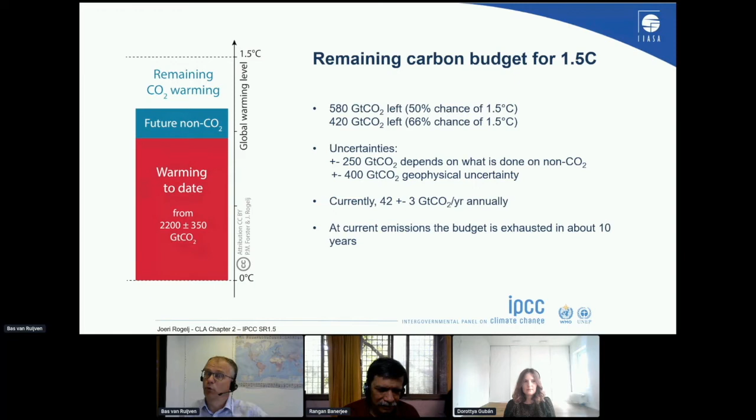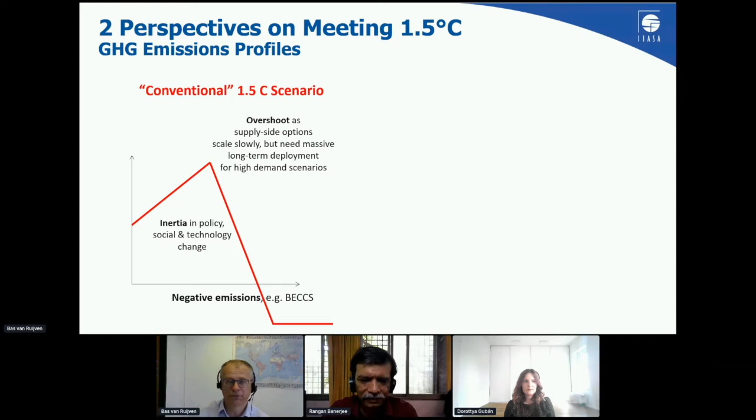In the scenario world, there are two perspectives on how to meet this target. The conventional approach has been that this 1.5 degree carbon budget is so tight that we probably need to overshoot it and then come back in temperature later in the century, going below zero with negative emissions. But what we try to do in a study we are publishing at the moment is to look at scenarios that do not overshoot and come back with negative emissions, but instead have a rapid transformation towards net zero now, immediately at the beginning of the century, with net zero emissions globally afterwards.

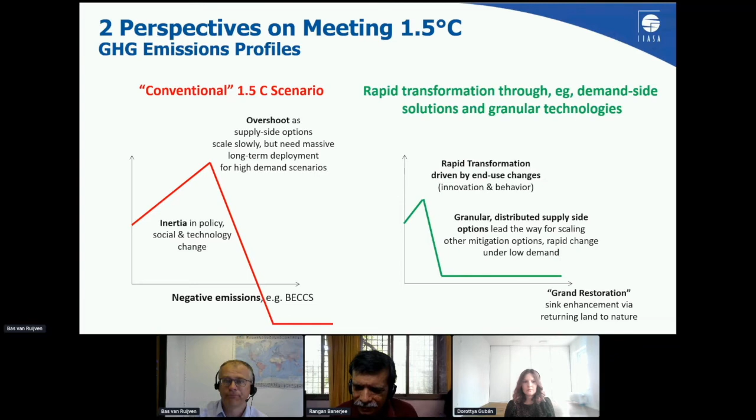This big community effort that we are coordinating at IIASA in the ENGAGE project explores the difference between the red arrows and the blue arrows in this graph on the left. Red arrows are scenarios that overshoot and delay the transformation but then go negative later, and blue arrows are scenarios that immediately go down and don't go below zero later in the century.

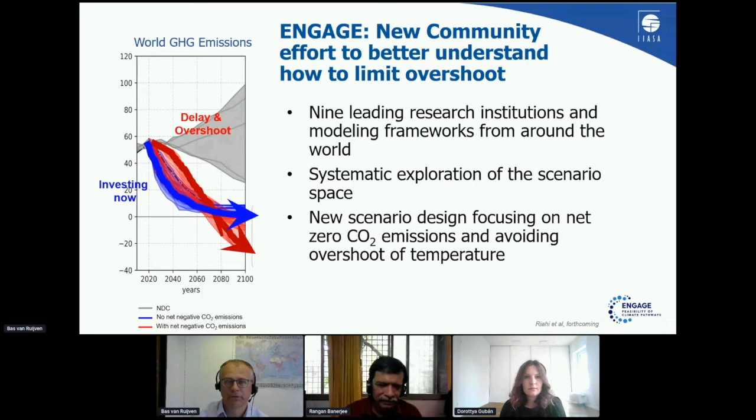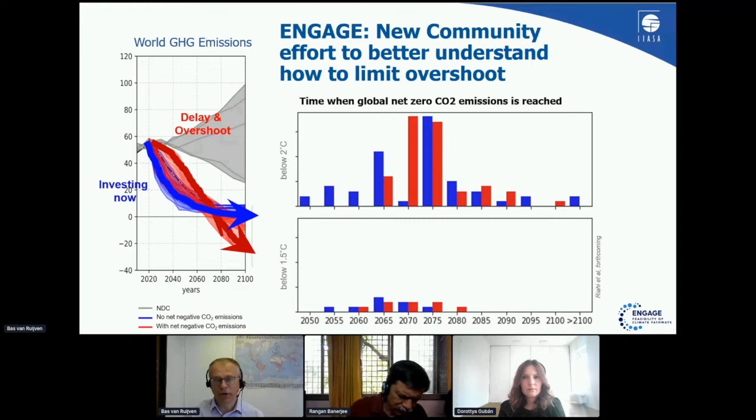If you compare these full-century versus net-zero scenarios, what we see is that for 1.5 or 2 degree scenarios, if you want the blue scenarios, the net zero scenarios, you need to reach global net zero much earlier than when you're allowed to compensate later in the century.

When we look at what these scenarios would mean for the different sectors, starting from the present day situation, we see the emissions in CO2 across the different sectors: forestation and land use and energy supply in green and red on the bottom, transport in light blue, and the industry sector especially in yellow and dark blue towards the top, which are industrial processes and industrial energy use. Those are a considerable chunk of present day energy emissions.

But if we look at their role in these net zero futures, we see that industry emissions are reduced, but often actually remaining still in a net zero world. Those positive emissions are being compensated by negative emissions, by carbon removals from the power sector and from land use.

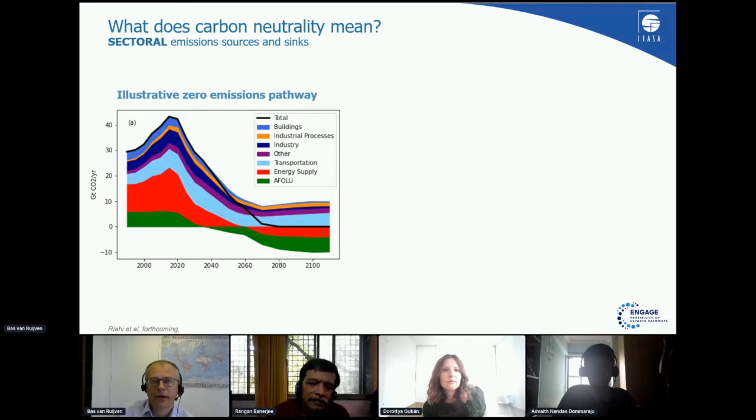This is one illustrative pathway from one single model, but since we do this exercise with many different models, here you see on this top right graph the balance between positive and negative emissions in a net zero world across 9 different integrated assessment models that partake in our study.

You see that often the sectors below zero are the power sector and the land use sectors, the red and the green, and above zero one still has sectors like the industry sector, both processes in yellow and energy use in dark blue. The only exception is some models actually see industry energy use or industry processes sometimes contributing to net carbon dioxide removals.

If we look at the timing of net zero emissions, we also see that land use and energy supply are the first ones to reach net zero, but industrial processes and energy use in buildings, transport and industry are much later, if reaching net zero at all. So that's how across all of the integrated assessment models we see the emergence and the role of the industry sector in the bigger picture of reaching a net zero energy system in the second half of this century.

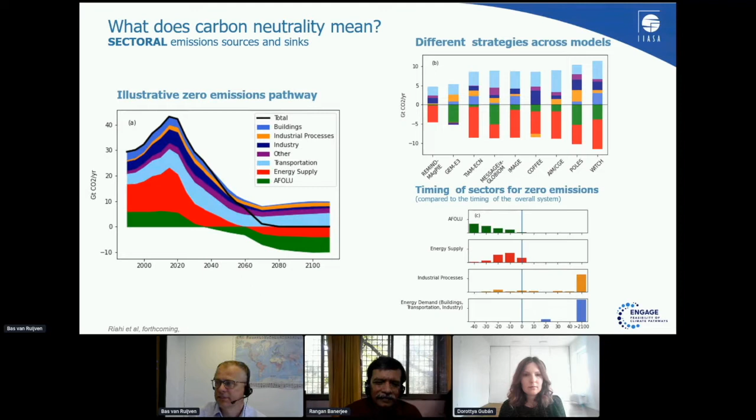Thank you, Bas, for providing the overall perspective and showing us how industry is actually a relatively harder to abate sector, and also that the industry sector could go to net zero and also be negative. So I'm going to quickly show you a presentation on the perspective of the zero carbon industry.

We start by looking at the Kaya identity. If you look at the total amount of CO2, we could typically break it up into carbon per unit of energy, energy per unit of materials, materials per unit of the product (material intensity of the product), product per unit of service, and amount of services. As the population wants larger amounts of services, we want to try and dematerialize, or reduce the energy intensity of the materials, or the carbon intensity of the energy.

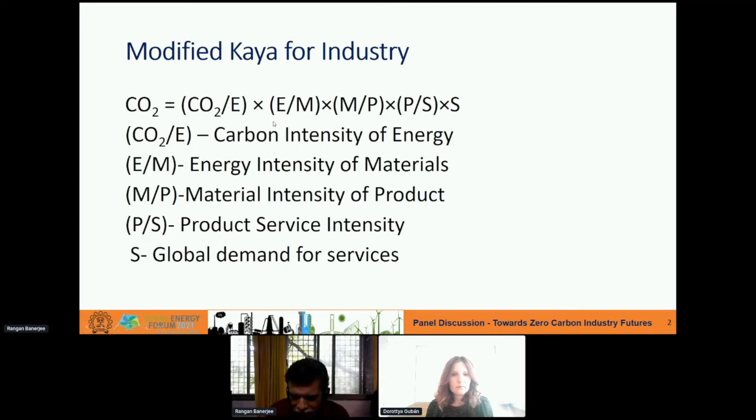This immediately shows us the options we have in industry. These options are energy efficiency—we can think in terms of benchmarking, cogeneration, process integration. We can look at resource efficiency: alternative raw materials that are less energy or carbon intensive, dematerialization, redesign of products, substitution of materials. Or we can have the same amount of energy but green the mix, using solar photovoltaic, solar thermal, biomass, waste to energy. We can look at product efficiency and recycling so less virgin material is used. We can also think in terms of next generation processes. And finally, we can keep the energy system the same but capture the carbon, utilize it, and then store it.

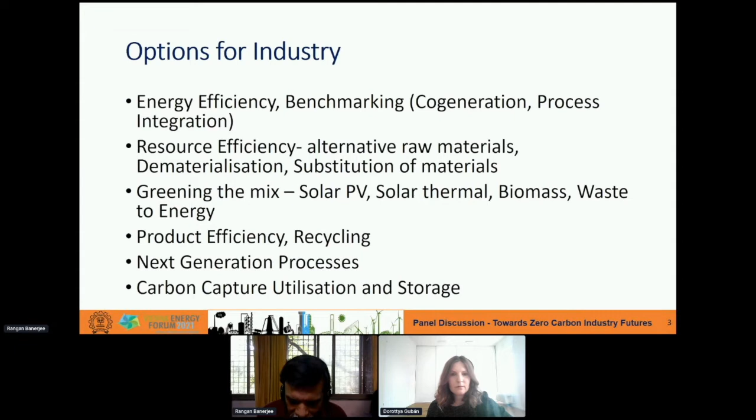On all these options, there are actually several examples in industry, and I'm going to quickly take you through some of these examples and open up the panel for discussion.

Overall, when you look at an industrial process, we start from raw materials and get the desired products. In the process we use a lot of utilities, but we can try to make this a cyclic process where we use most of the internal flows so that we use less of the external utilities.

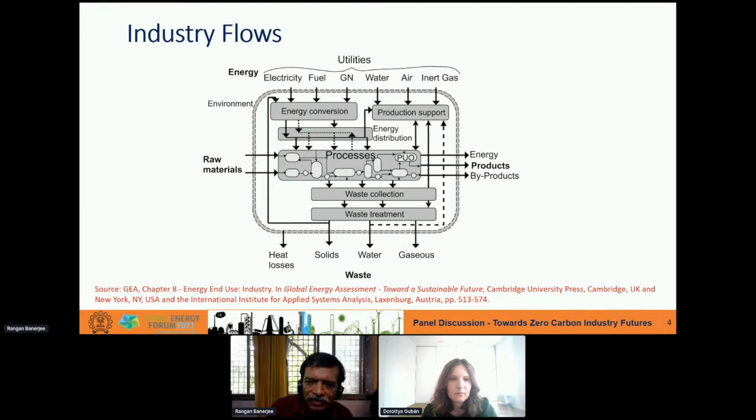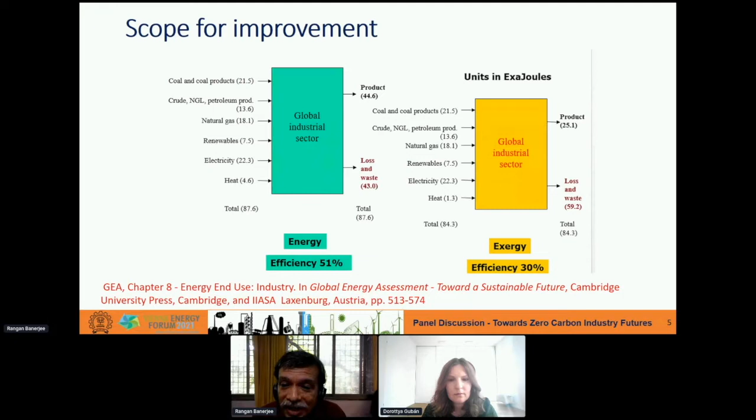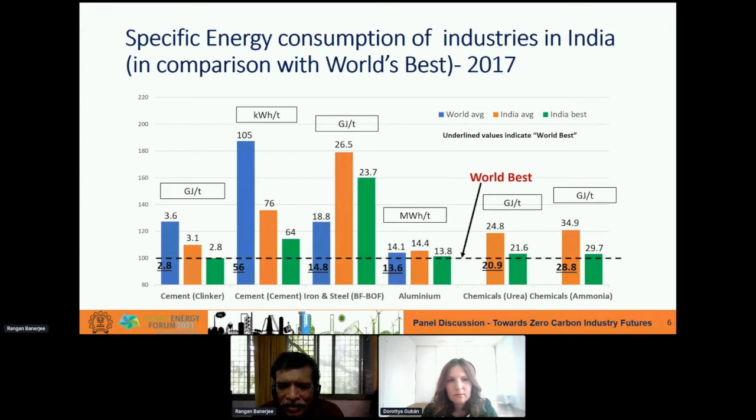I'd like to show you a glimpse of some major industries in the Indian industrial context. This shows that in several Indian industries, we are amongst the world's best—for instance, in the case of cement. If you look at some of the others, we have some catching up to do compared to the world's best, and then there is the average. So there are many industries which are much lower than the actual best practice within the country or globally.

You can see a similar kind of emission pattern—these slides will be made available to you. This is the CO2 emissions, and interestingly, in the case of aluminium, though we were near the world's best in terms of energy, we are much worse than the world's best, and that is because the aluminium sector basically uses electricity, and a large amount of this depends on the electricity mix.

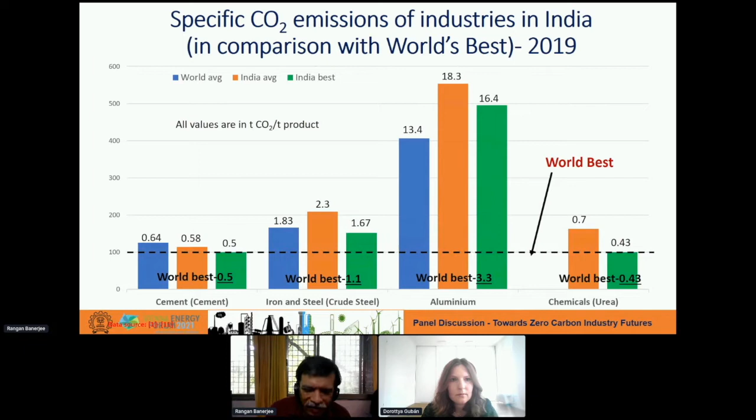Most of the Indian electricity mix is from coal, hence you see 18 tons per ton of aluminium, while the world's best is 3.3, where this is a plant using hydro for electricity. So there are many different options we can look at.

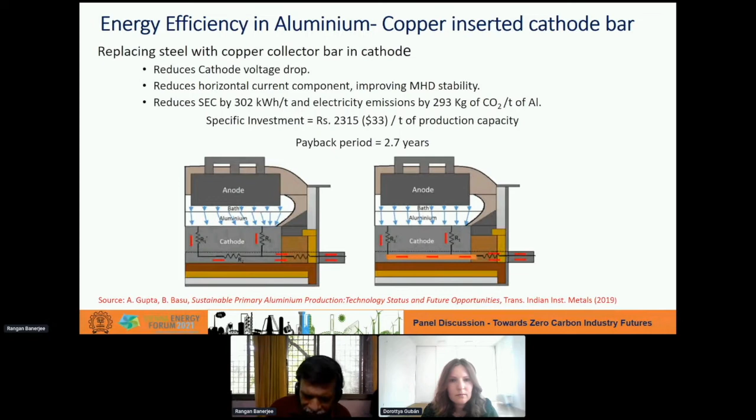One set of options which is a no-brainer is that in each of your industrial sectors there are many different energy efficiency options, and these are usually cost effective in their own way. For instance, in the aluminium sector, you can look at replacing the steel with a copper collector bar, and in this industry this has a reasonable payback period.

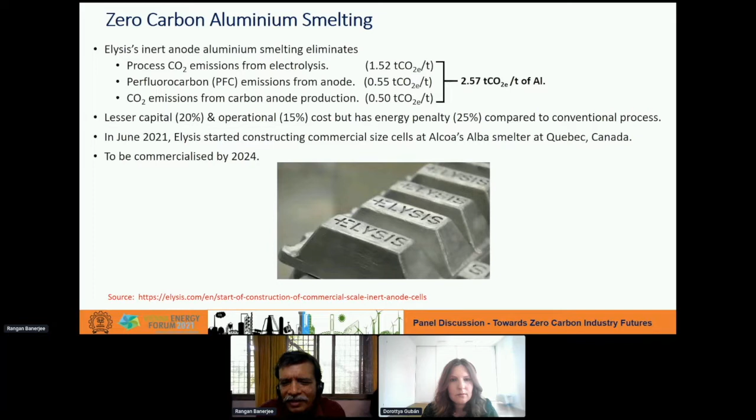There are also new processes being talked of, still in development. There's a new company focusing on zero carbon aluminium smelting, looking at inert anode aluminium smelting, which is still in process and prototype, with a large plant planned to be commercialized by 2024.

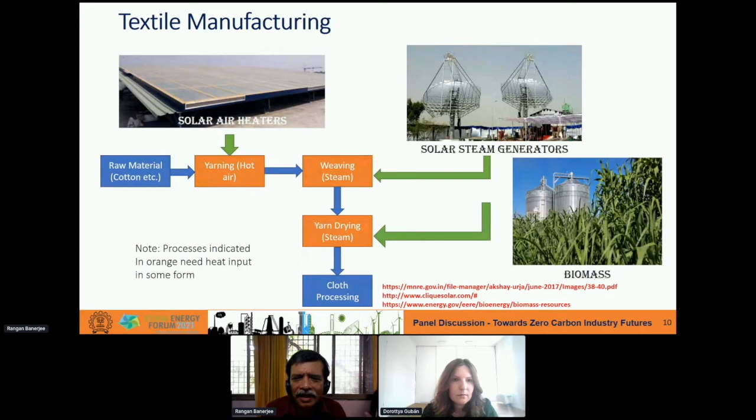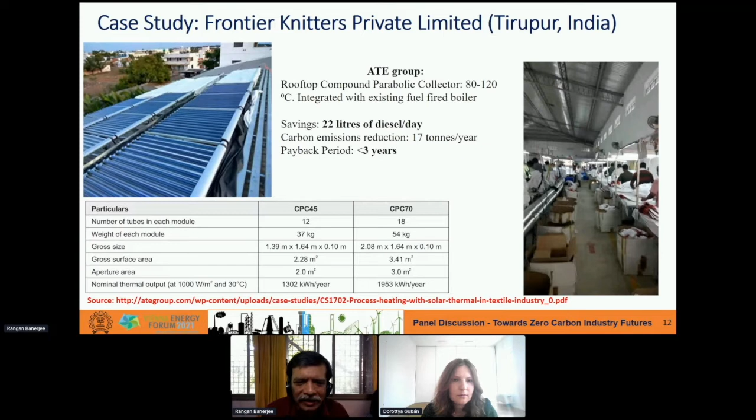Some examples in the textile industry in India look at solar thermal, biomass, and solar photovoltaic, and this actually meets all the requirements for textile manufacturing in an Indian context. One of the examples from India.

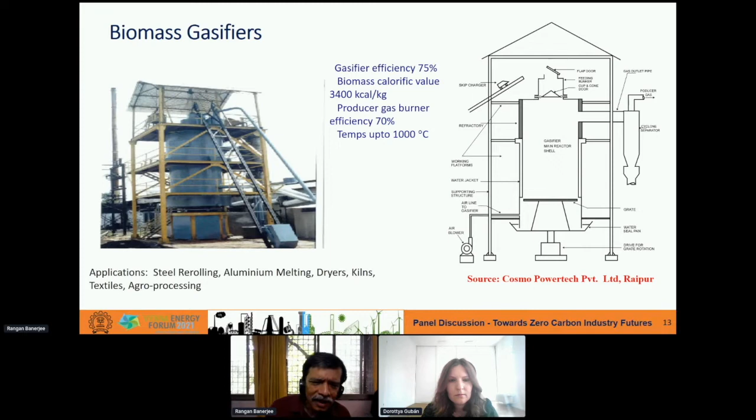There are several examples of biomass gasifiers being used in steel re-rolling and aluminum melting instead of fuel oil or light diesel oil, and these are commercially applied in the small sector.

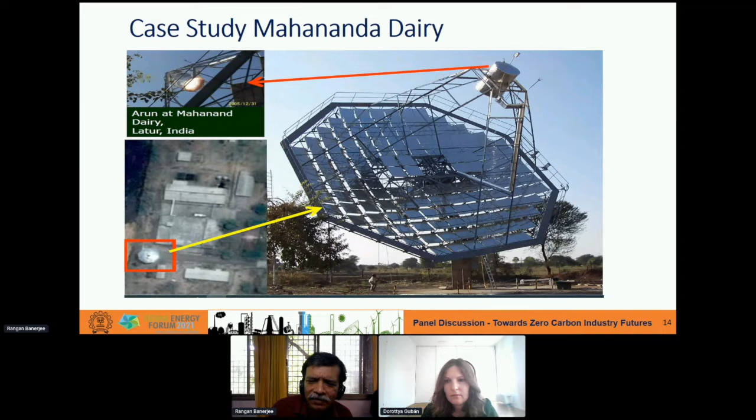This is a solar concentrator used in a dairy in western India. Instead of steam generation from furnace oil, this uses solar concentrated steam.

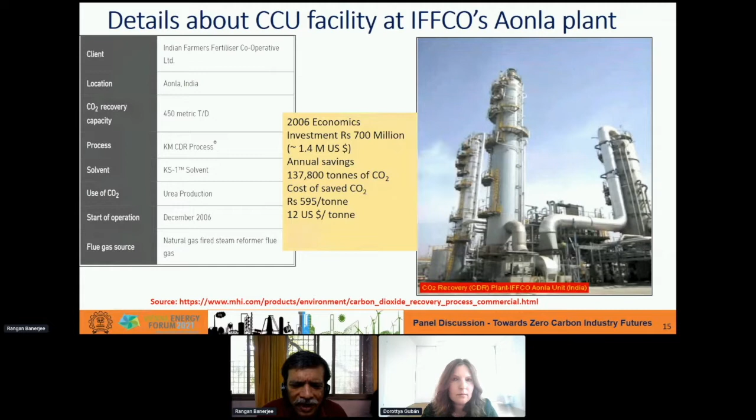We also have examples of carbon capture and utilization. This is an example from a fertilizer company where flue gases are scrubbed with a MEA system, where you take out the CO2, and that CO2 is used in the production of urea. This is reasonably cost effective in terms of tons of CO2 saved.

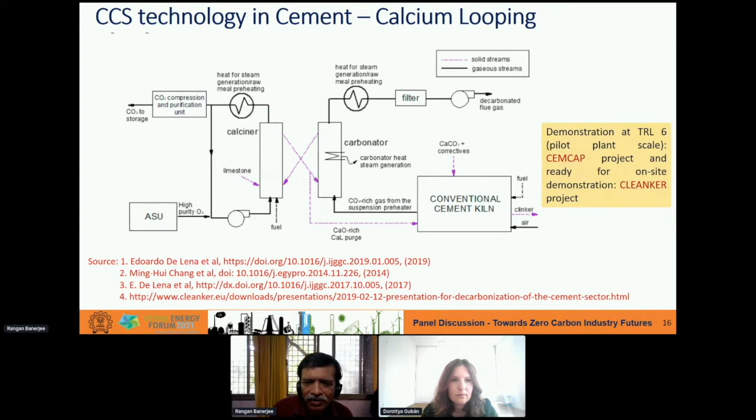There are also processes now at pilot scale where you integrate cement with calcium looping technology, so the CO2 is captured and then goes out to storage. So several things are possible, whether related to energy efficiency, renewables, or carbon capture and storage.

Now the questions for discussion today in the panel are: is zero carbon or low carbon an achievable goal for industry? What are the barriers? What policies are needed to support these industry transitions? What needs to be done to catalyze the R&D required? Where will the investments come from? And is there a competitive advantage or disadvantage for industries that opt for low carbon?

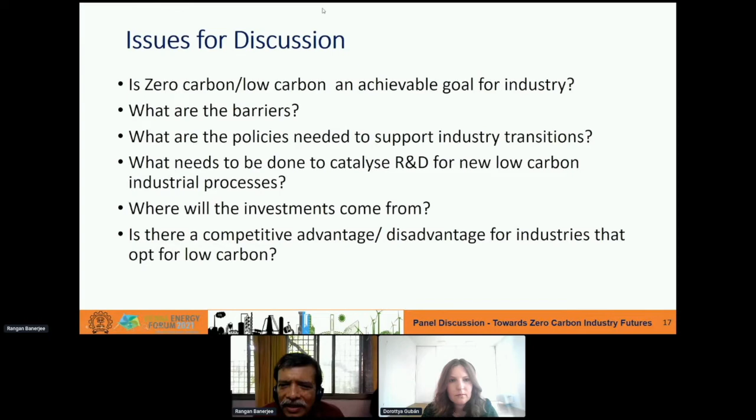So with this, I will open this up, and we will request our panelist. Lars, will you please go ahead and provide your opening remarks?

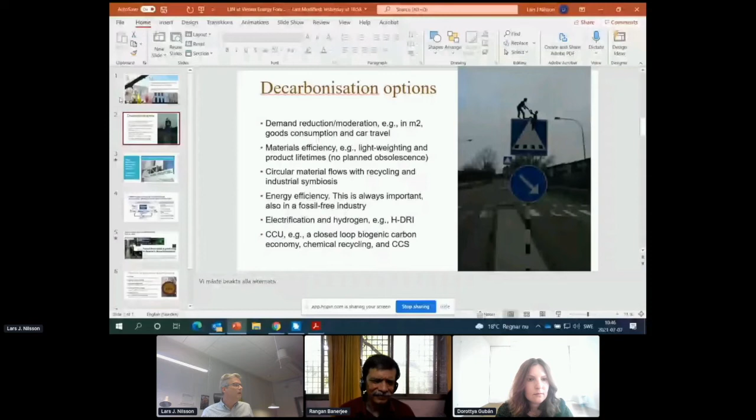Yes, I also prepared a short presentation for you. Do you see this now? I don't see the slides. I don't know if others are seeing it. Can you try it again? Okay. Now, okay, we see it. Yeah, we see it. Please put it on slideshow.

Thank you. Starting where you started, Professor Banerjee, with your Kaya identity, and stressing the importance of looking at demand and materials efficiency and recycling for the purpose of having to produce less primary materials, primary production.

I think a big change that has happened in the past years is that renewable electricity has become much less expensive with solar cells and wind energy technology. So electrification and hydrogen have become real and interesting options.

And I think we saw a real shift in strategies in industry after the Paris Agreement, when it became quite clear... sorry, I have some sound issue there.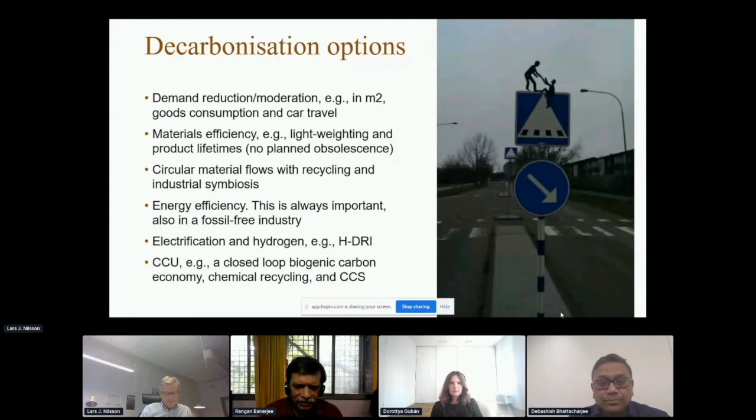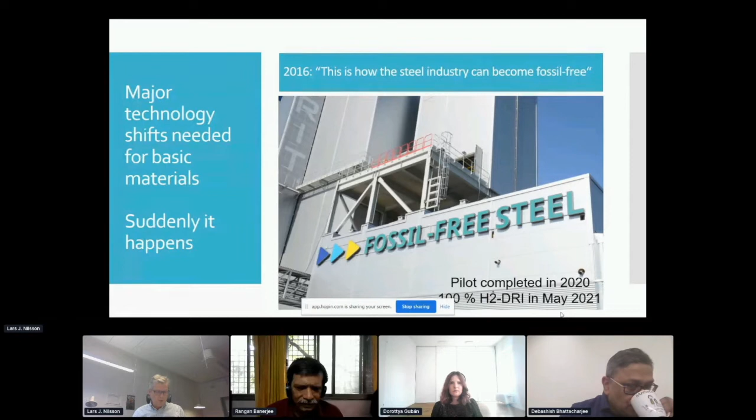So, for example, in 2016, the Swedish steel industry announced that they will become fossil-free. And just a month ago, they produced their first 100% hydrogen direct reduced iron here in May 2021. They've also accelerated plans to build a large-scale demonstration, 1.35 megatons per year, with a 500 megawatt electrolyzer capacity. So this is moving quite quickly now in the steel industry, not only in Sweden but also in other countries.

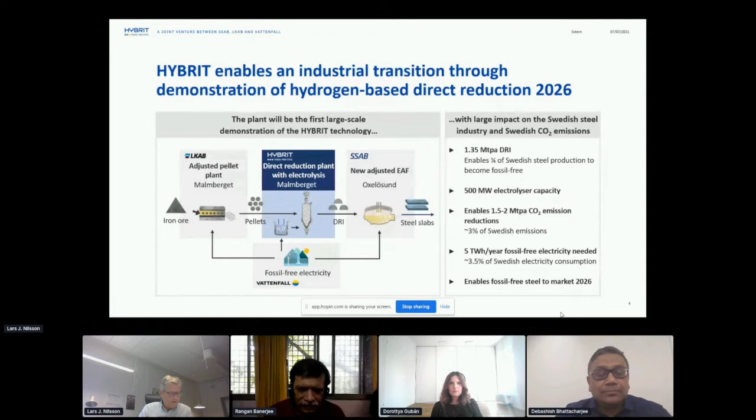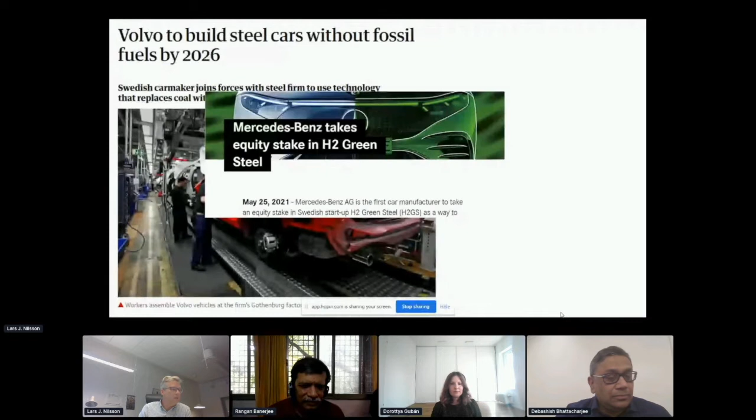A lot of interest from car makers. Volvo has hooked up with this HYBRIT project, but there's also been the announcement earlier in spring of a H2 Green Steel plant, a greenfield new steel mill, where Mercedes-Benz takes an equity stake, and also truck maker Scania gets involved. So certainly things are moving quicker than one would have thought a few years ago.

On the policy aspect that Professor Banerjee mentioned, we've done some thinking around how we can think about this industrial decarbonization transition, informed by different literatures, including innovation system literature, pointing to the importance of directionality. We need a clear direction for development for industry so we're not creating new lock-ins, and we need to look at the whole value chain, not just the primary production. Of course, we need innovation and new technologies.

But even more, we need to think about how to create and reshape markets. How do we create green market demand? As I exemplified, there is a demand, for example, for green steel in the car industry.

We need to build capacity for governance and change also in the industrial sector. If you compare with the energy and transport sectors, where we have government ministries, government agencies, whole university departments working on transport and energy, we don't really have that when it comes to industrial transformation. And of course, industry is a tricky sector because we need international coordination and coherence due to competition between countries for industrial products, and also taking care of phase outs of, for example, blast furnaces, and the retraining and reinvestments needed for making this transition.

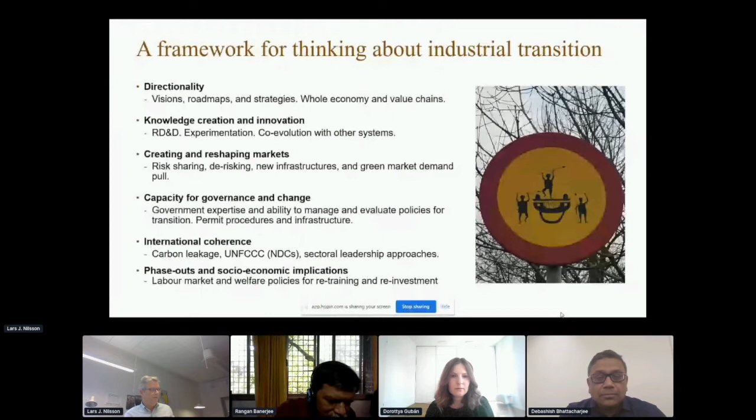So that was a very short input to the discussion on policy approaches, and I hand back over to you now.

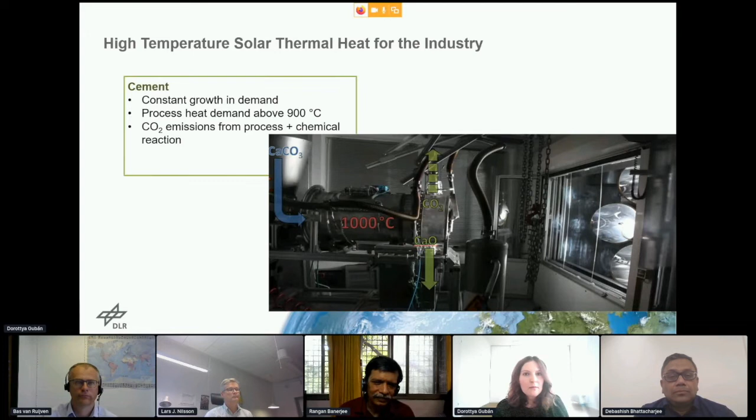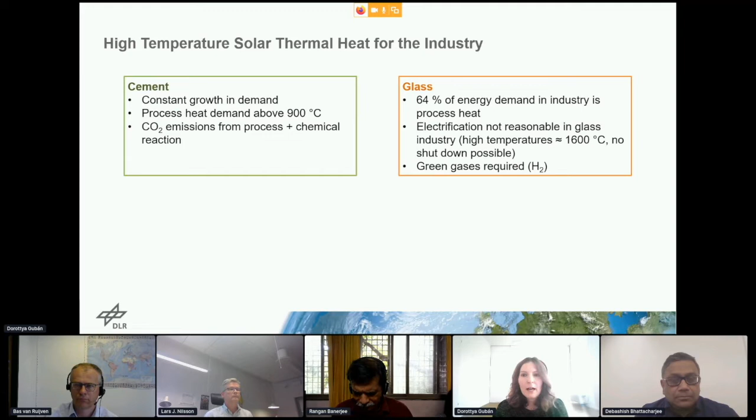Another very important chemical for the industry, also mentioned, is of course hydrogen. One example is the glass industry, where we need extremely high temperatures for the process, which is not even achievable, at least yet, with CSP technologies. That's why we need some sort of fuel, for which hydrogen is one possibility.

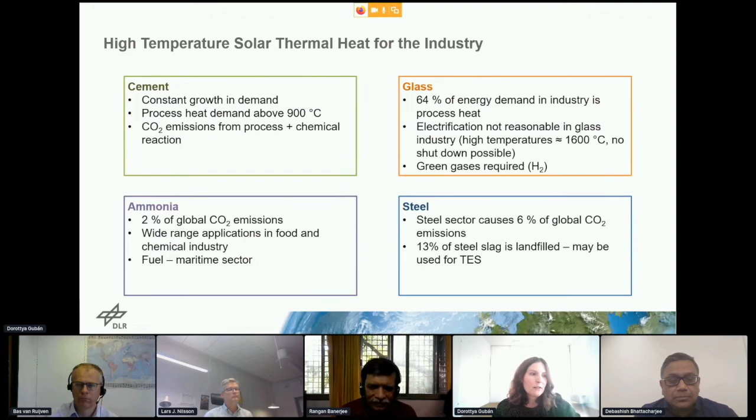The next example is the steel industry, where we need hydrogen for the reduction, also mentioned before. I would also like to put here the ammonia industry, where one of the most important feedstocks and one of the highest energy demands comes from providing the hydrogen for the Haber-Bosch process.

Here we developed two different concepts, one for the short term, to reach the goals by 2050, and one for the long term. The first concept is actually a hybrid electricity-thermal plant which utilizes an electrolyzer. And in the long term, we are considering a fully thermal energy based process, so water splitting via a thermochemical cycle.

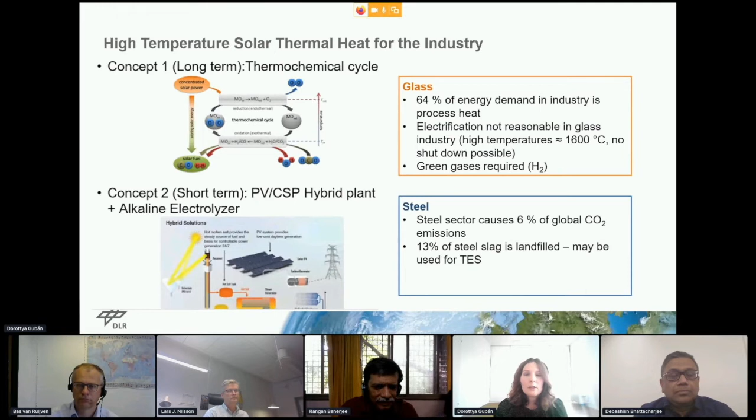And just to finish off, I would like to give some facts and figures about this technology. So currently we are able to reach around up to 1,000 degrees Celsius. Plants are available up to 200 megawatts.

What I would like to also put here is that one of the main barriers and reasons for the low number of investments is the high investment costs, especially if we have a look at solutions with storage, which is, I would say, essential on the long term for continuous industrial processes. So here you can see the numbers.

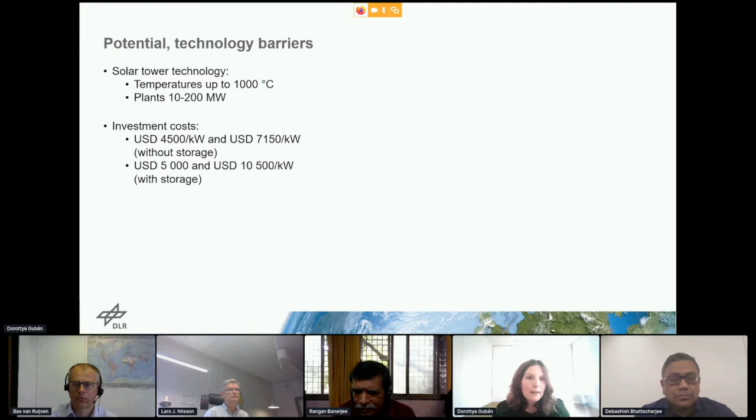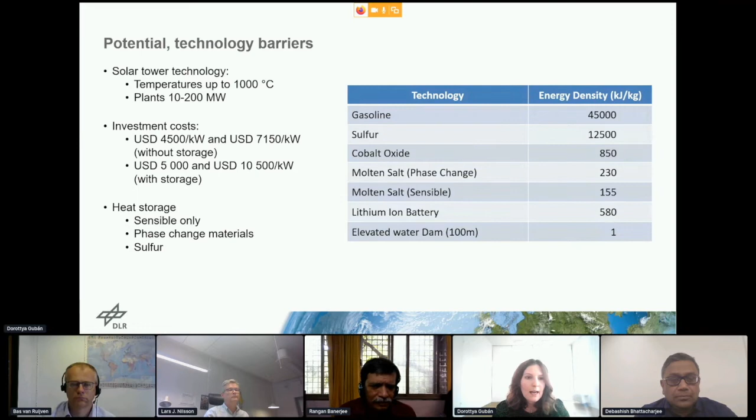This is why one of the main questions for the future is finding suitable storage solutions beyond the conventional molten salt, and probably sulfur is one of the most promising ones. Yep, thank you very much.

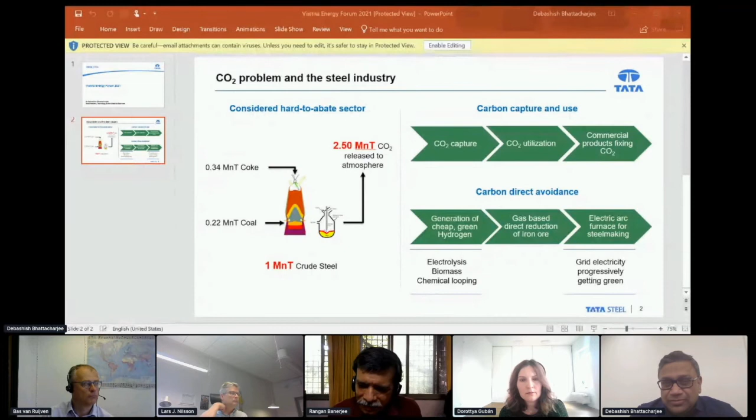And of course, the other is to generate hydrogen, partly to take care of the carbon in the blast furnace if they remain, and completely replace carbon in the gas-based direct reduced iron route, which will need subsequently green electricity in the grid. So we see all this panning out over the next 15 to 20 years, with multiple routes being simultaneously used, green electricity being a fundamental need going forward, and multiple technologies for getting to cheap green hydrogen. Hydrogen has to come at less than $1 per kg to make it viable for the steel industry. So with this, I'll stop and ask for any comments and questions.